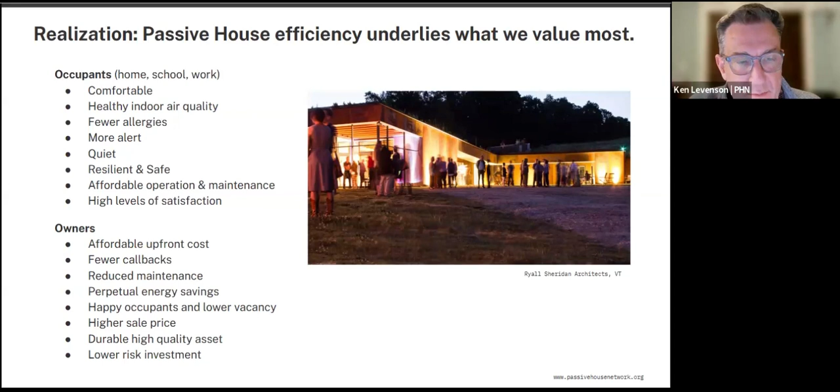So there are a number of ways we could go into that more and more, but let's leave that there for the moment.

The logic of Passive House is interesting, where it came from. Passive House is building science. It's not some crazy esoteric thing. It's all the basic physics that folks have been dealing with for a long time. It's just kind of really focusing it and giving the important things the attention they deserve.

An interesting part of the origin story of Passive House was that the German physicist who really started the modern Passive House movement, Wolfgang Feist in Germany, has this quote: "I was working as a physicist. I read that the construction industry had experimented with adding insulation to new buildings and that energy consumption had failed to reduce. This offended me. It was counter to the basic laws of physics. I knew that they must be doing something wrong. So I made it my mission to find out what and to establish what was needed to do it right."

So here you see this German scientist seeing the building industry applying insulation but not having any beneficial result from it. And we could see that today. The contractors ask, why do we need to do this? And the owner would be like, why did I do that?

It's not unlike cooking, where you have a few key elements of cooking—there's a wonderful book, Salt, Fat, Acid, Heat, you may be familiar with. If we master these basic elements of cooking, we can make a great meal. It's similar with what drives performance, and Passive House kind of uniquely forces us to focus on that.

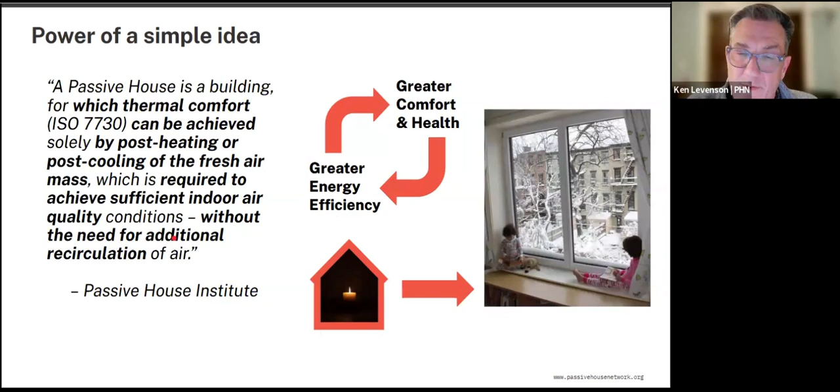So you can sit by a window on a cold winter day and be comfortable without any radiators about. To achieve this thermal condition that's going to allow us to maintain comfort and high quality indoor air quality conditions...

We're focusing on five principal aspects of the building physics. Now, there are other things—orientation, massing, a realm of things—but in terms of the structure itself, the architecture, we're looking at climate-specific levels of insulation, number one. Number two, that insulation needs to be truly continuous, eliminating thermal bridges—we'll come back to that and discuss it more.

Along with the insulation continuity, we want air tightness. We want airtight continuity. We want control of that indoor air. We want to keep the pollution out. And then we want high performance windows and doors with solar protection.

The windows and doors are continuations of the heating, the insulation and the air tightness. They will provide some solar gains, but these are not passive solar houses in the historic sense. We are not needing to overheat with the solar gains. We want to keep it quite modest and balanced. The energy model is very important in that.

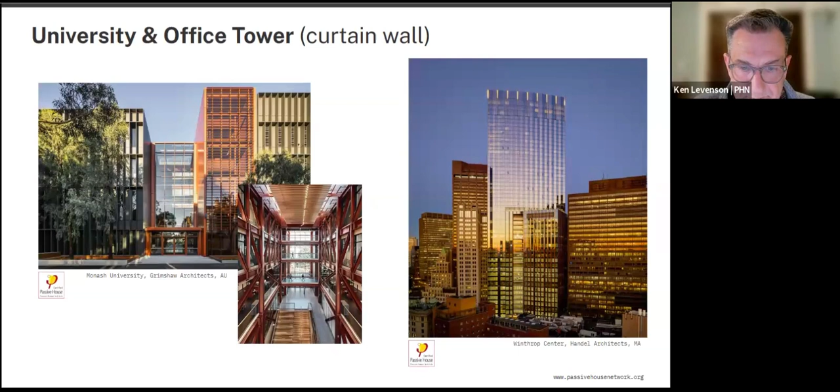But here we see an office tower in Boston, a big university building in Australia. Part of what passive house has become, and it's an important part, is aligning with our all-electric, all-renewable energy future. The typical way we look at energy use with buildings is EUI, source EUI, coming from the coal power plants, the natural gas power plants, the energy losses along the way to a building, and ultimately the use.

This is really based on a carbon emissions approach, which totally makes sense historically. But as we move to an all-electric power supply fueled by all renewables, what really comes into play and what's most important is the simultaneity of the use with the generation, because the different renewables, based on location, climate and characteristics of the grid, give you a different mix of renewable supply. Depending on how you use that energy, it's either going to line up directly with that supply, or you may need some short-term storage day to day to get you through the night, or long-term seasonal storage.

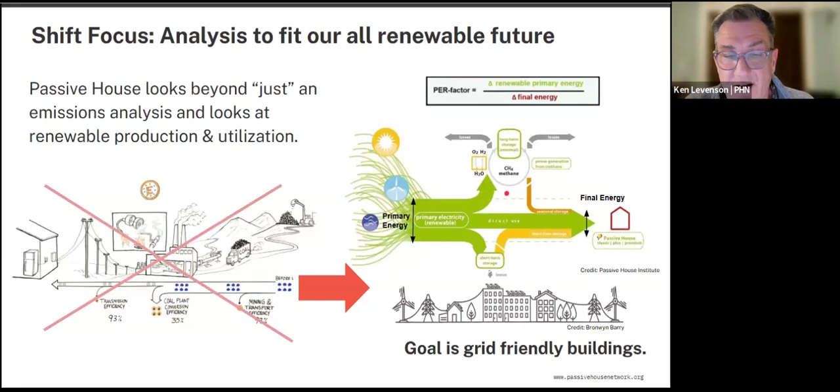And so it's rating how you're using the power to a hypothetical, hopefully not hypothetical, future energy distribution reality. So what we are trying to do ultimately is tune the building to the grid.

So it's not only efficient in terms of the building, but it's efficient in terms of the build out of the grid. Because what we have in typical net zero single family homes, even if they're more energy efficient than what we'd typically be doing, there's still a significant seasonal gap in the winter time, a huge gap between where our renewable production is typically lowest, and then in the summertime we don't need as much, but we've got all this power.

So this is a net zero single family house that really isn't net zero, right? Because it's not producing the energy when they need it. So there are additional losses. For this to be truly net zero, it would need to produce even more energy to make up for those storage losses that would be needed to move this power from summer to winter.

When it's needed. In Passive House, we're crushing that heating demand, we're reducing the overall electric load, and we're tuning the building. So we have a much smaller gap in the wintertime, and we can dial down that renewable production. So the solar panels can really be cut substantially and still hit quote unquote net zero.

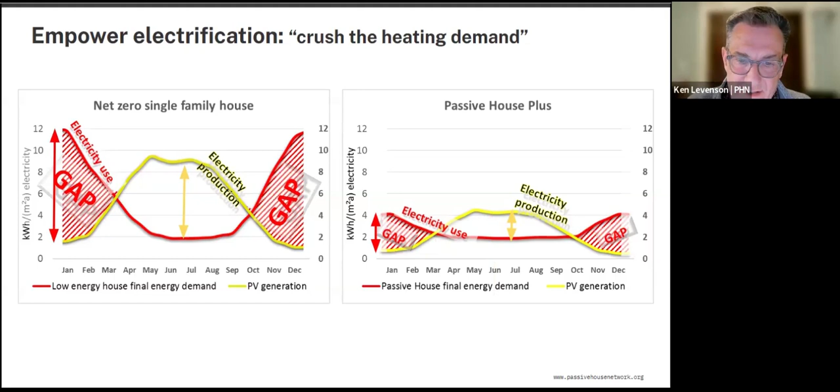One quick example of why we want to move to Passive House. Massachusetts has just brought on mandating Passive House in a number of ways, calling it the thermal code for their commercial buildings, but literally Passive House for multifamily.

And what they did is a study where they showed a school and the load on the electric grid due to heating and cooling of the school. For the model code where they had gas heating, you had a summer peak of the electrical, and there's no electric to speak of in the winter because the heating is with gas, not electric. Now, if they just move to electric heating with the model code, their peak on the grid is going to be over 4 times their summer peak.

And so all of a sudden they're blowing up the grid capacity with this move. And this is one of the big pushes and problems that are stressing the grids, this capacity shift. But if they build the school to passive house levels, the heating demand is no greater than the cooling demand, and so there is no new peak. It's the same old peak. There's no need in terms of this building to increase the capacity of the grid.

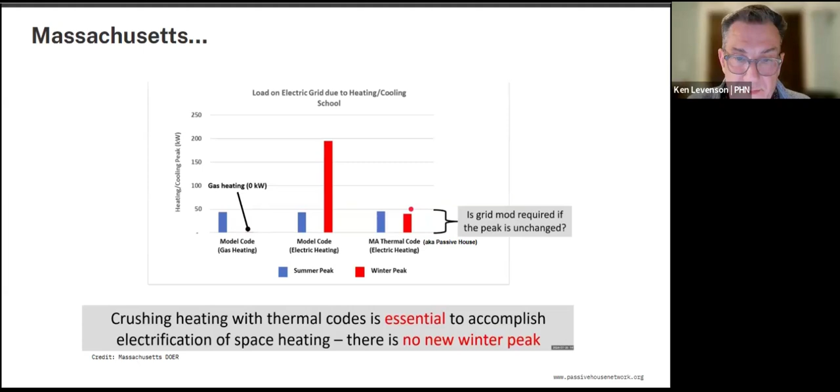And so an investment in Passive House could really be seen as an investment in the grid, and why they see these buildings as being grid friendly and have pushed for investing in them.

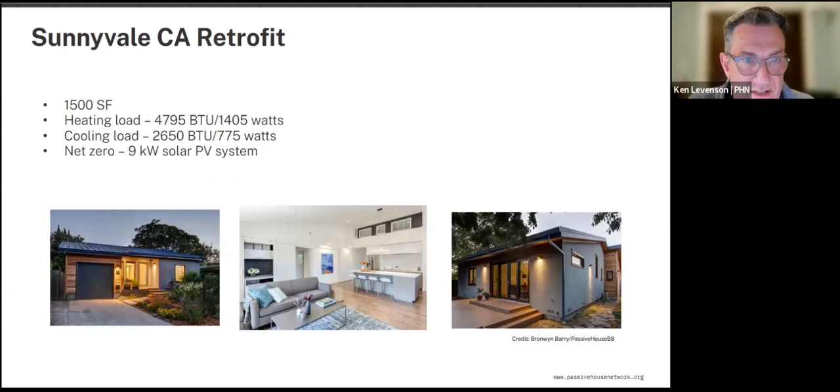Just a quick note, more local, a retrofit here in Sunnyvale, California. A 1,500 square foot modest home went for net zero with a 9 kilowatt solar PV system. But it's true net zero in the sense that, here are some of the things they're using: induction cooktop, heat pump hot water heater, mini split heat pump for heating and cooling with compressor outside, typical stuff in terms of electrification.

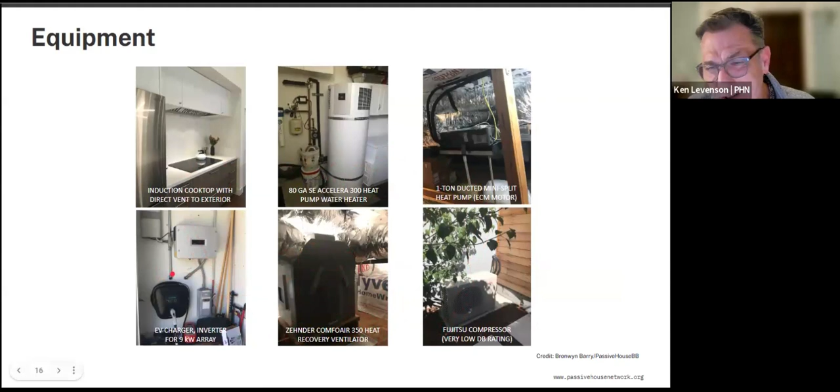Then we've got a Zehnder ventilation system with heat recovery and a charger for the car. Cars and the charger for the car are not part of the passive house calculation, but you can end up getting essentially free car charging with the reduced demand that the house needs because of the passive house.

So the results from this house: this top blue line is the typical houses in the zip code. The lighter blue line is the predicted energy use by the energy model, and the yellow line is the actual use. And so you have this pretty nice flat line.

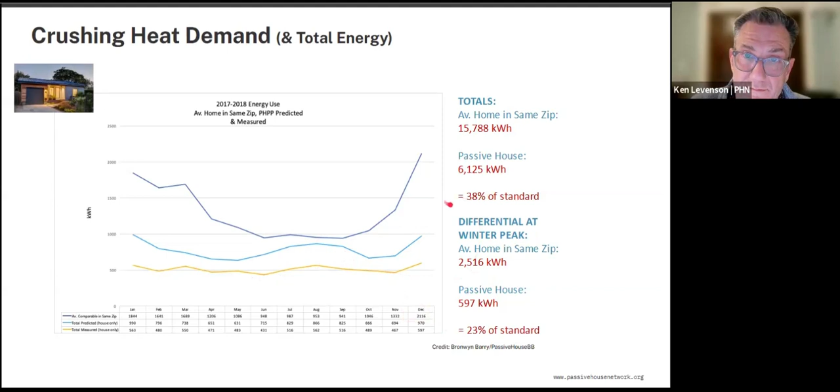You have a pretty substantial reduction in demand of 40% of overall energy use, 38%. And what it does is, rather than having this wild swing of power, it's much more consistently tuned. We have a 726 kilowatt hour monthly average used and 797 monthly average produced without huge gaps, which is quite nice.

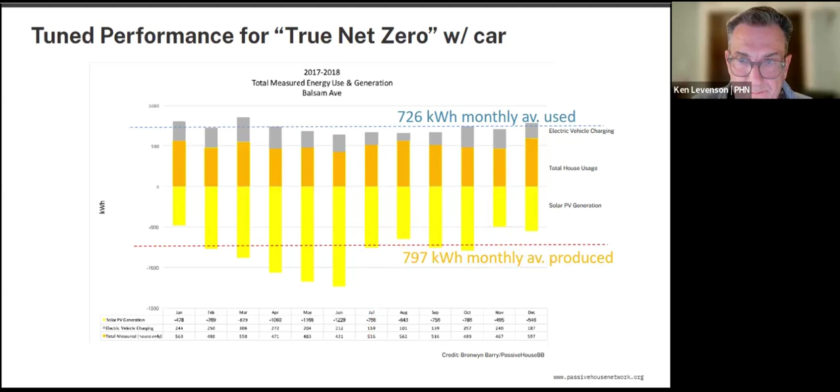Other homes are just over in the west, Santa Fe, New Mexico, up in Olympia, Washington. They can be any style, any shape and size.

One of the interesting things is, as an architect, I stopped practicing architecture, ironically, back in the day, shortly after those first few projects that I did, because I got into passive house advocacy and growing the capacity in the United States. But as an architect, what really intrigued me was this idea.

What Passive House was focusing on was the architecture, the structure, the fabric of the building. And it really was empowering the structure of the building to drive performance. Many architects may see that as a burden, like gravity is a burden.

But I think the way to really look at it is getting back into the details and how, before we had big central air conditioning systems, we worked with building form to provide shading and more comfortable spaces while still connecting to the outside.

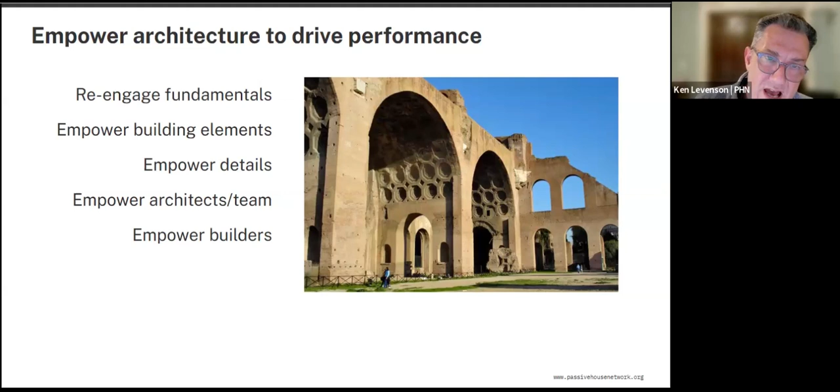And so we see teams really getting jazzed by that, and also the builders as well, as they're not just putting together a kit of parts per se. They're putting together a whole optimized machine in a way, and what they do really drives the performance of the building in a measurable way.

Passive House, of course, didn't come out of nowhere. There were precursors, and we have in Scandinavia and Germany buildings and studies done in the U.S. and in Canada. Interestingly, the Norwegian polar explorer ship, the Fram, had all the attributes of a passive house.

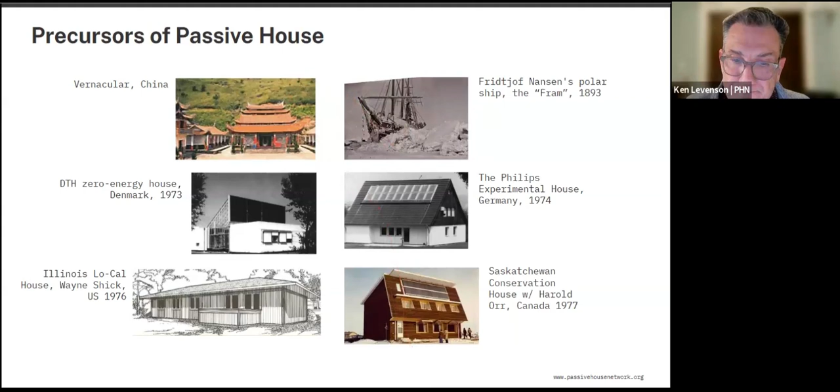Vernacular architecture, of course, and I think one way architects and passive house architects work is they may still be doing modern buildings, but look at vernacular architecture and what happened, in particular in southern China. Swedish academic Bo Adamson was doing research on the buildings of southern China and their passive attributes, which led directly to the creation of the first modern passive house building, completed in 1991, with Wolfgang Feist, who we had that quote with earlier on.

It's not a single family home. It's actually four flats, more like four row houses, a small multifamily building with units. They did it as a physics experiment. They had custom windows, a custom ventilation system. They tried to make it as low energy as they could go and test the boundaries to see what was possible.

The story goes that Amory Lovins came from the Rocky Mountain Institute, visited, and was super excited. He was like, 'My gosh, this could be scaled. This isn't just a laboratory experiment. You need to roll this out.' And from this initial experiment, the Passive House Institute was formed in 1996.

They kind of formalized the protocols, the energy modeling, and have been doing research ever since. The institute is a research, building performance research laboratory institute that's been doing research around Passive House ever since.

One of these things hitting this low energy state, we saw with the Massachusetts school example how it really crushed that heating load. It's the same with the Sunnyvale home, having specific targets. It's not percentage improvement, so we're going for a number, and that changes everything in terms of our optimization and staying focused on it.

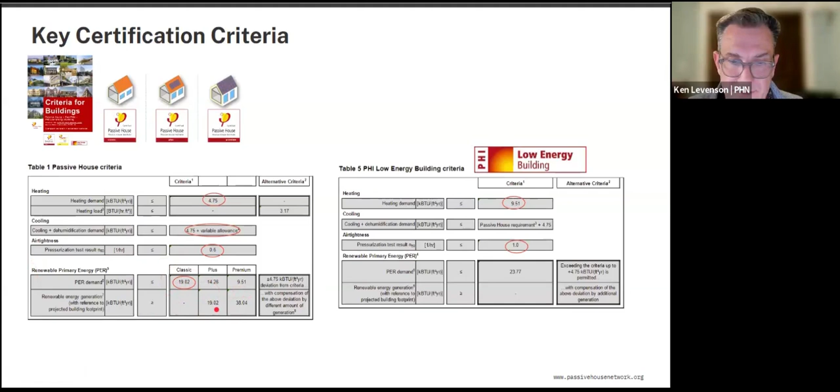There is an energy limit, but it's based not on the source EUI carbon emissions number that we would have done traditionally, although you can calculate that in the PHPP. It's done based on this primary energy number. So it doesn't correlate directly, but you're being graded on your suitability to the future power grid.

There's also a retrofit standard. You can do a retrofit and certify to the standards, but because there's typically going to be conditions with an existing building that make it very difficult, they have the retrofit standard.

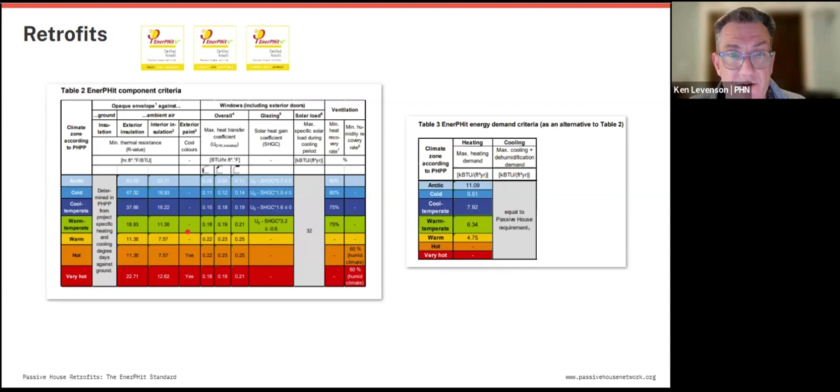There are two pathways: you could do the different demand levels where they've eased them up, or you could do a component method where the different assemblies require different R and U values depending on your climate zone. You're still calculating, still goes into the energy model, but it's more of a slice and dice approach that can be easier to optimize.

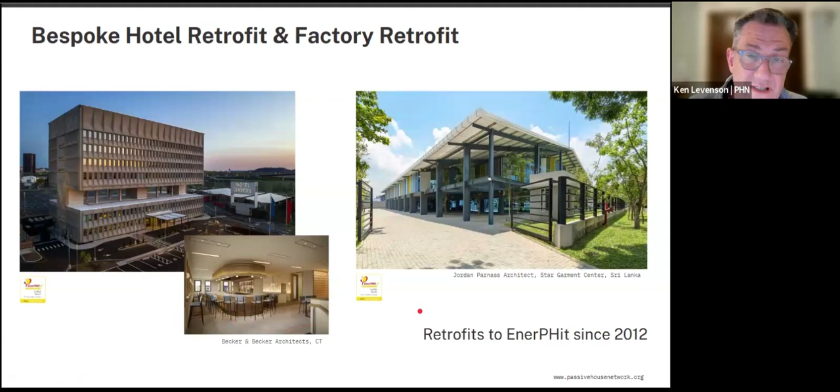These are two fun projects in terms of retrofits to think about what's possible. On the left is a classic brutalist building in New Haven, Connecticut, by Marcel Breuer for Armstrong Rubber back in the day. It sat vacant for many years and has recently been reborn as Hotel Marcel, certified as a Passive House retrofit. On the right is a garment factory in Sri Lanka -- hot, humid climate, factory use, and a retrofit. So a lot going on there.

Predictable performance is the thing. We can do energy efficient buildings just within the bounds of using the building code. We'll need to do better than code buildings to be really energy efficient, but you don't need to follow a specific program -- you just need to get there. But there's no assurance of getting there without clear guidelines.

LEED is great for a lot of things in terms of sustainability and definitely can be worth doing, but energy use at the end of the day, and the benefits that arise directly out of that, perhaps not the way that LEED is built. So you could have a really bad performing LEED building or a great performing LEED building, but you could still have LEED certification.

In a Passive House, there's going to be some variability -- occupancy, user differences in how they might use the building -- but we're going to have a pretty narrow band of usage. That house I did, that first house in New York, the townhouse, was actually in Brooklyn Heights. It was a pre-Civil War building, 1849 I think it was. All the other neighbors had 12 to 15 tons of air conditioning. Our calculations said that we needed 1.5 tons, for a 5-story, 5,500 square foot home.

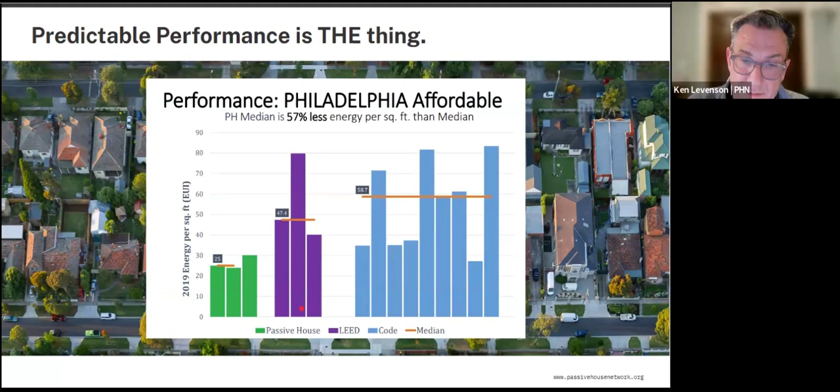And that's scary as heck when your client is spending a fair amount of money gut renovating a home. So we knew there was some variability -- we increased the size of the mechanical system from 1.5 tons to 3 tons. But we're still dropping from 12 to 15 tons to 3 tons, and you better be sure that you're going to be hitting that, or we're going to have very unhappy clients. The Passive House methodology is what gives us that confidence that we're going to hit the predictable performance -- super important for overall design optimization and controlling costs as well.

Passive House is high quality construction. It's going to typically cost a little bit more -- it doesn't have to cost a lot more. In multifamily buildings today, we see it costing 2 to 5% more, pushing towards parity.

Which just tells me that there are a lot of drivers of cost in a project, and passive house does not need to be the overriding cost factor. If you're optimizing, you can control the costs and even come in very close to cost parity. Here, this is multifamily again—they actually came out with the passive house being slightly less, if you can believe it, than the conventional. This is Pennsylvania Housing Finance Agency. I'm not going to sell that passive house costs less. It is high quality, but it does show that the optimization is there and possible. What you need to really focus on is applying passive house from day one in the program and really have it there as a key programmatic element.

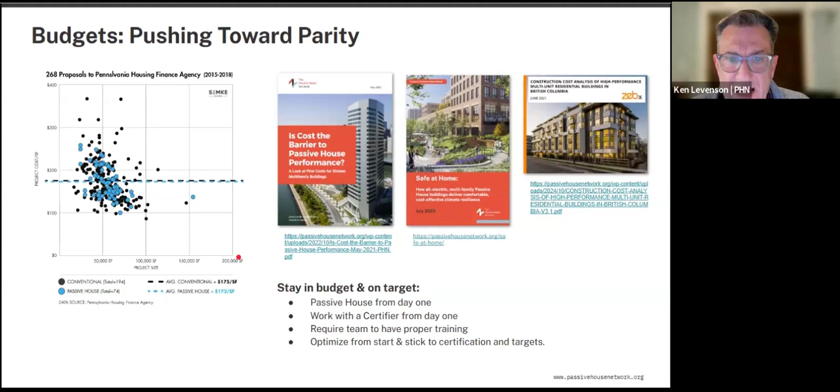Like gravity is a key programmatic element, we want to work with a certifier from day one. A certifier can cost a few extra dollars, and there is one in the East Bay, Steve Mann, an early adopter—he's a passive house building certifier in Berkeley. Work with him or another one of the certifiers; there are over 35 now working in the United States. They can really help you avoid costly mistakes and help move the project along in a smart way. Have the team get some proper training and stick to those goals—it will actually help keep things on target.

So let's dive through the methodology in a little more detail. We'll go through this pretty quickly. So climate specific insulation levels, in your neck of the woods in California, unless you're up at the higher elevations or further north, I'm imagining it's not too difficult in terms of the insulation levels. It can be pretty modest. The idea is going to be continuous and appropriate.

So it's not reacting to the environment so dramatically. I like to say that our conventional buildings are kind of like teenagers who are wearing hoodies on cold winter days—it's just substandard. We wouldn't dress ourselves like that, and we shouldn't be dressing our buildings like that. We want a good parka that's appropriate to the weather.

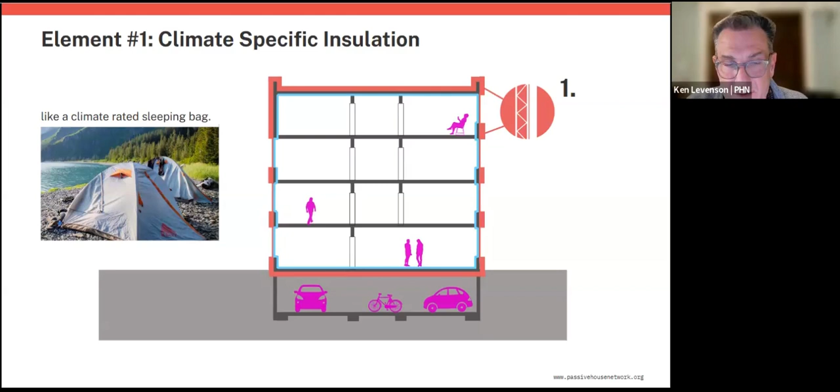We want that parka and insulation around the building to have as few thermal bridges as possible. We want to calculate them if we do; even if we don't, there are pluses and minuses to it. And we're going to be looking at every intersection—the floor to the wall, the roof to the wall, where structures come through, how the windows attach to it. It's a big difference between conventional energy modeling and passive house, where we're really nailing down all of these parts.

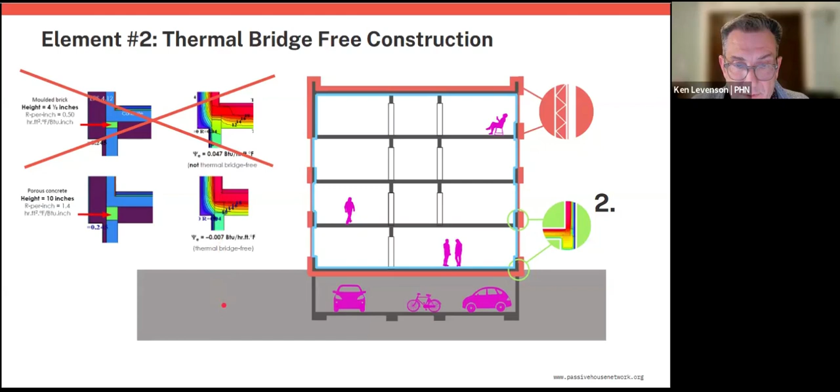Because what you can have is like this diagram—we have the wall and the floor, you have insulation, but then you have the masonry coming up through, stopping the insulation, and we have a masonry unit that is not insulative, and we have a thermal bridge. It's not thermal bridge free. However, if we just substitute this material for AAC block, porous concrete block, it's going to be insulative enough for it to not be a thermal bridge. It becomes thermal bridge free. It's keeping the surfaces warmer, the structure warmer, and maintaining that performance. So it doesn't need to be elaborate—it just needs to be thoughtful and intentful.

We want thermal bridge-free construction because in a passive house, typically we're going to have better humidity conditions than we would in a conventional house. We're going to target between 40 and 60% indoor air humidity—in the winter that'll be pushing towards 40, in the summer towards 60% typically. And if we have thermal bridges, if we have cold surfaces and we have more humidity, then we're going to have condensation and mold problems.

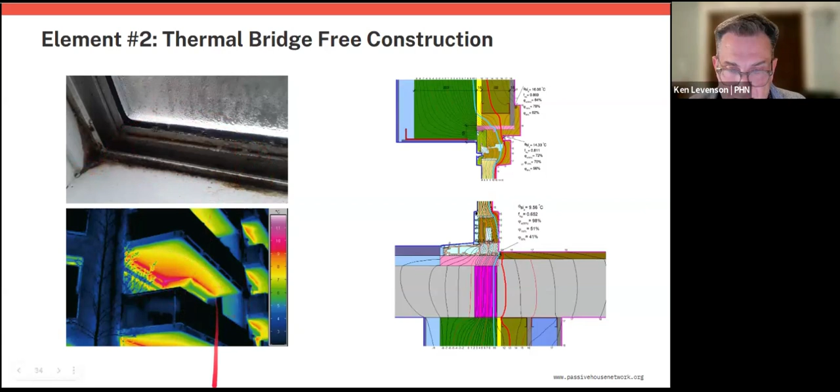This is just conventional building, but so be it—so we very much zero in on that. Typical buildings have so many thermal bridges, they're basically radiators to the world. We want to make sure our components are in alignment, and again we have that good, good thermos construction. Airtight—we also now call it smoke tight over the last few years of wildfires, and we experienced it in New York actually a year and a half ago or so.

With our skies becoming orange, airtight construction keeps the outdoor pollution out. It also reduces drafts and moisture damage, allows us to control humidity inside with much less energy, and allows us to control temperature with much less energy, making sure we have good control of indoor air quality.

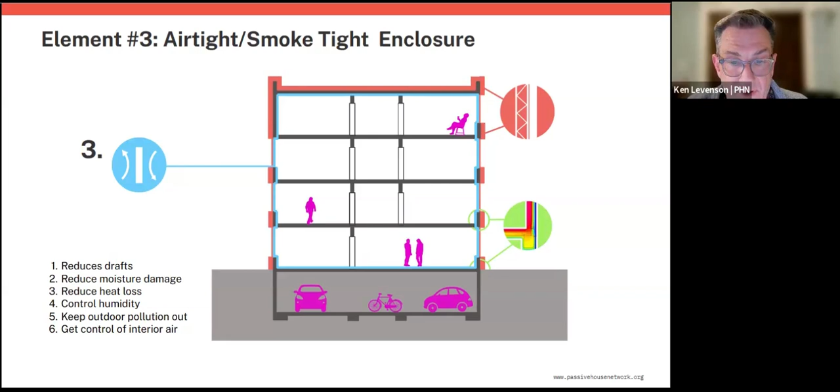With ventilation, we know we can maintain a very high level of indoor air quality with a small amount of energy. So air tightness is fundamental to a whole range of aspects of performance, like a windbreaker over a fleece sweater. The windows typically are going to be triple glazed and truly thermally broken.

They don't always have to be triple glazed. It's very climate dependent, but often. We see this as part of fire resilience as well. You can see the air tightness, but also the triple glazing, the simplified form in some respects. A number of aspects of passive house design, while not done with the intention of being fire resilient, do add to the building's wildfire resilience.

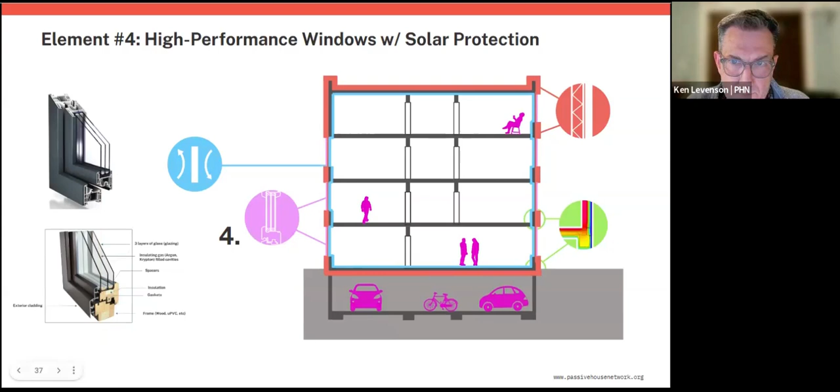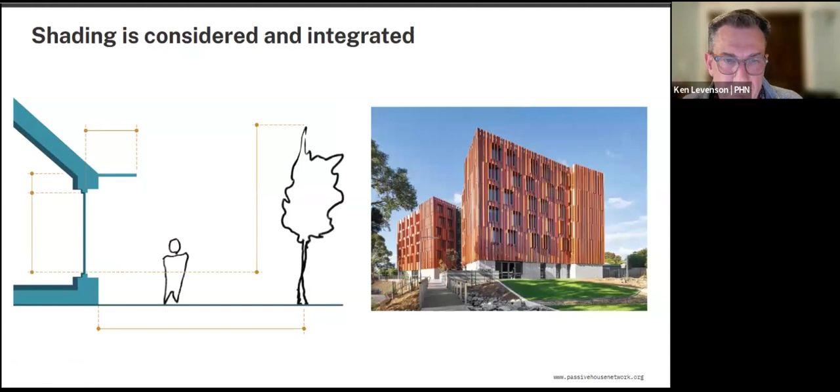There's going to be triple gasketing as well for air tightness. We're going to look at shading, and hopefully shading becomes an architectural element. We want to use all our space comfortably. The triple glazing is really a comfort-driven thing, and we want to get away from the typical where the glass gets too cold.

We feel the asymmetric radiation losses, causing convective currents, things we have to overcome with mechanical systems. If we can get that temperature close enough to the other surfaces, we have a much more thermally calm space.

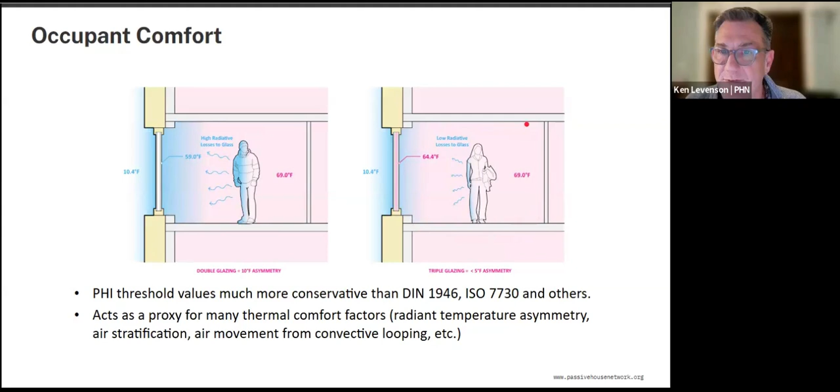So you have the acoustic calmness, you have the thermal calmness. Typically when people visit a passive house and experience that, they're like, oh yeah, I want this. This is nice. It does not feel weird. It feels really comfortable.

Hygienic ventilation with heat recovery. So hygiene, right? Good hygienic indoor conditions was a key part of that definition initially. So we're supplying fresh air 24/7 continuously to all the served spaces, the bedrooms, the living rooms, the offices, the classrooms, the assembly places, the conference rooms.

And we're exhausting from the service spaces, the bathrooms, kitchens, hallways, utility rooms, and so forth, laying it out in a way to make sure that we are going to have good ventilation no matter the conditions outside, and know that it's guaranteed. Because we're running it 24/7, it's 100% supply and exhaust.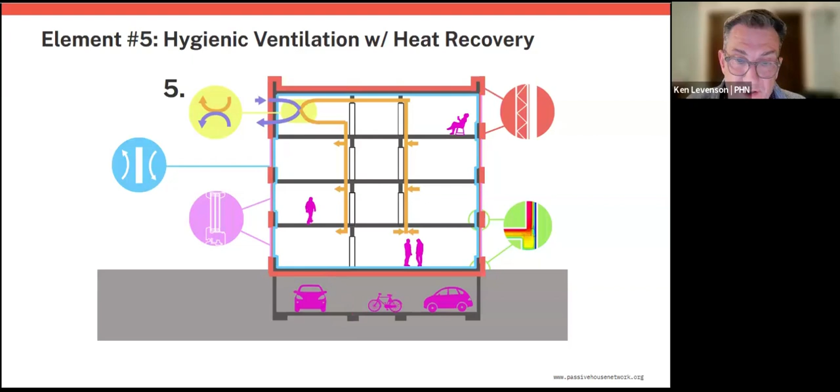We're running it through a heat exchanger and recovering that air. We're also filtering the air, getting rid of the allergens and making it more healthy and comfortable.

But as that air is going out, the fresh air is coming through counterflow heat exchange, and we can now get heat recovery over 90%. So very little energy loss with really good units and really good comfort.

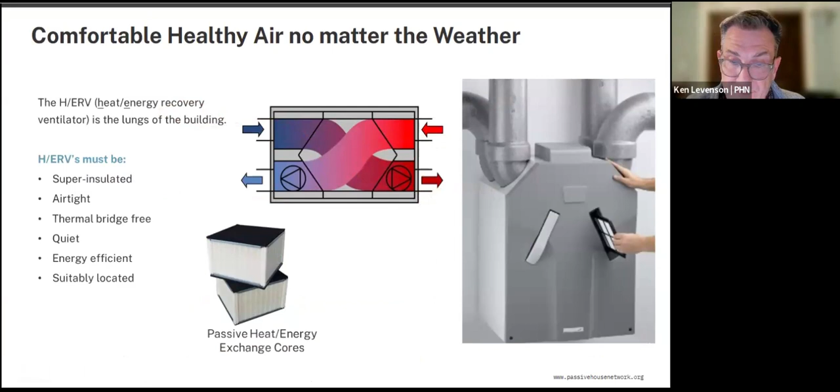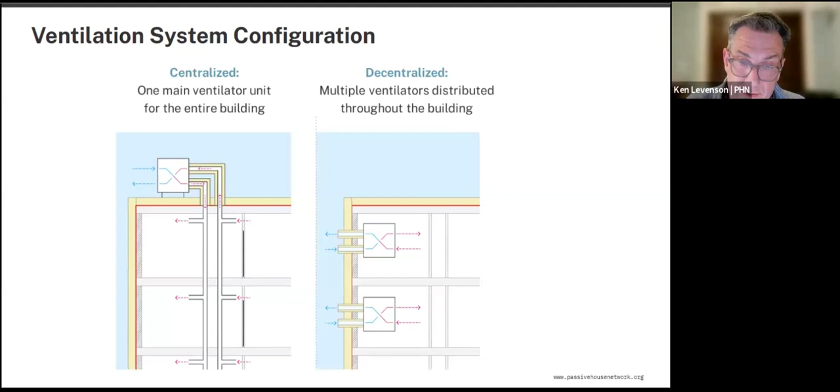They're also very quiet, it's just two fans running, very energy efficient fans. It's like having two bathroom fans running, but now you're ventilating your whole house, decentralized or centralized.

So we've established the performance, then we right size the heating and cooling. We're talking about typically around a 75% reduction in sizing. Typically now it's heat pump, combined heating and cooling.

We can pull the distribution to the core of the building. We still want to put the conditioned air into the spaces we need it, but we can pull it to the interior walls, and it doesn't need to be in any particular spot per se, just in that space. So it's freeing up a lot. The insulation may take away a couple inches, but the mechanical systems can give back some inches as well.

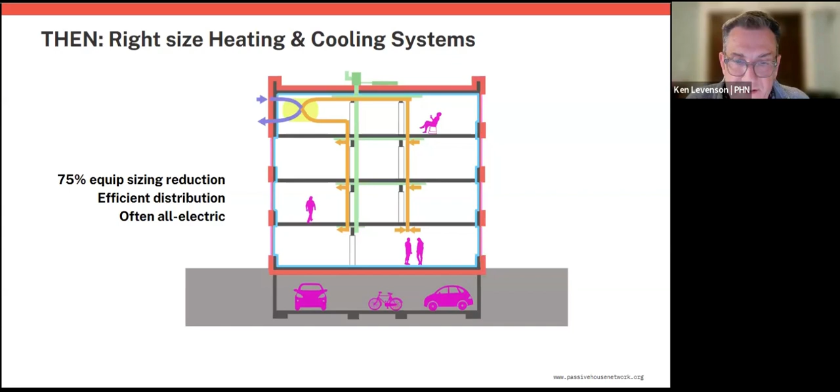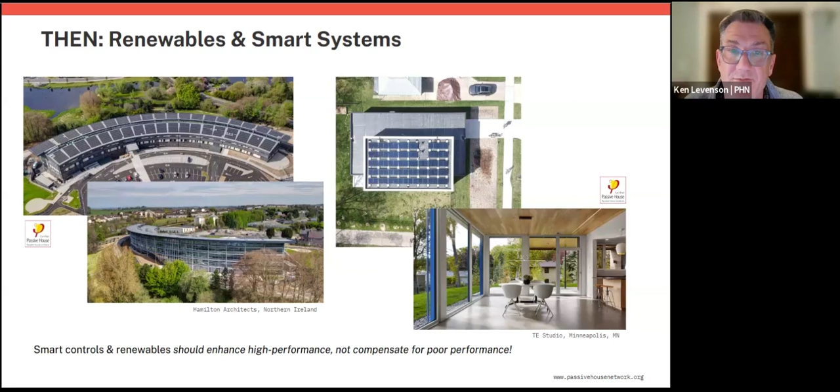Once we've added the heating and cooling, now we're talking about renewables and smart systems. You can do a smart system, you can do renewables, it's part of the standard. What we don't want is the smart systems and renewables to compensate for poor performance. We want them to enhance high performance.

So we've got our optimized design. It's going all around the world, it's applicable everywhere. In many cases, although it's about climate mitigation initially and reducing carbon emissions, it's also very much about adaptation, that as heat waves come, as freezing polar vortexes come, power outages come, wildfires come, these are more resilient, safer spaces to be in.

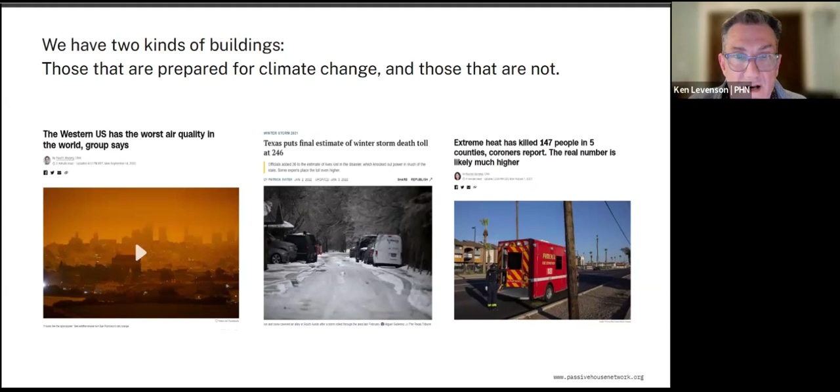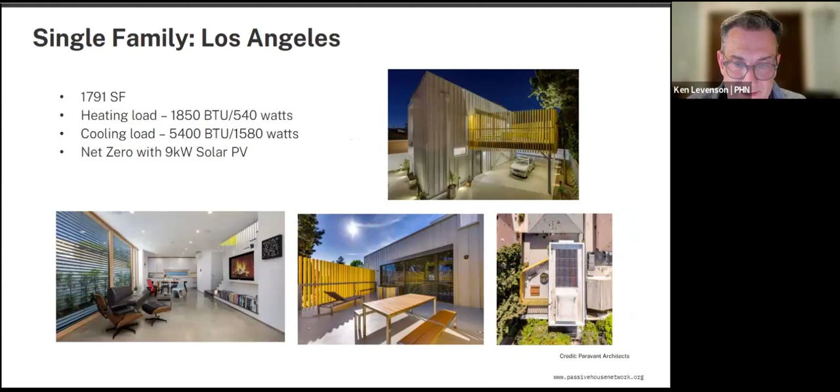Here's a single family house in Los Angeles that was not near the fires, but a great example, very compact, quite modern looking, with solar panels, the typical kind of setup as we saw, although they did the solar shading to great effect on this building.

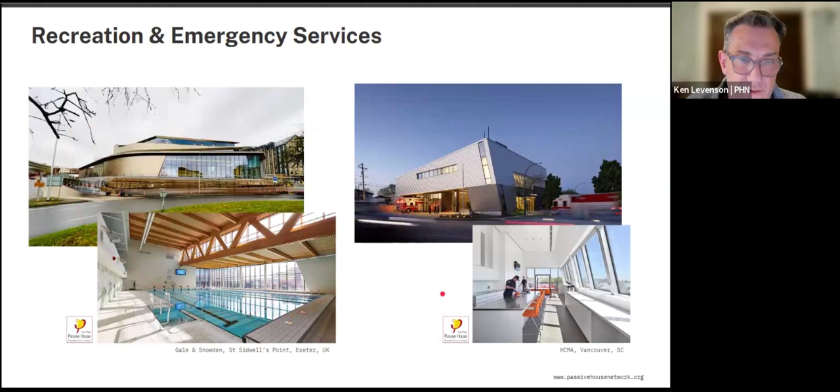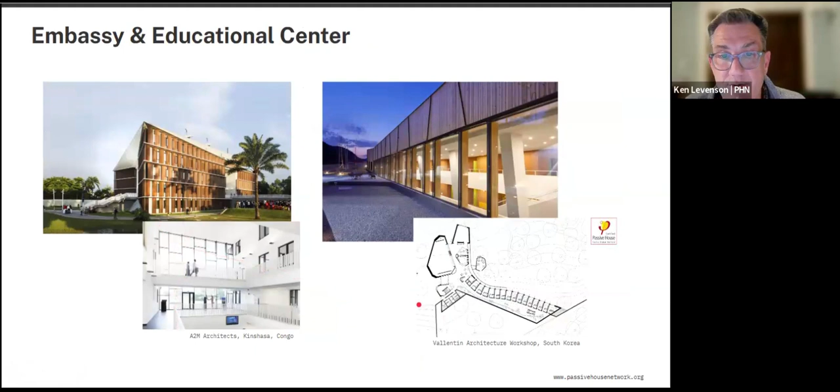Fire station in Vancouver. On the left is the Dutch and Belgian embassy in Kinshasa, Congo, a hot, humid climate as well. Humid climate in South Korea, an education center.

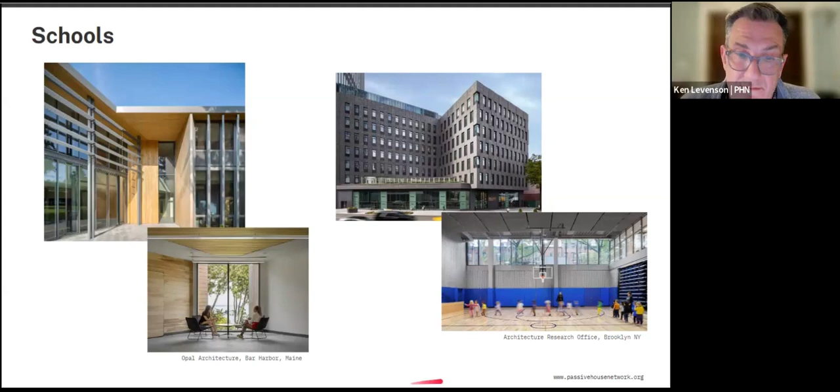Beautiful buildings. A college in the Northeast on the Atlantic coast in Bar Harbor, Maine. And new schools that were just completed this past year, an elementary school and a high school in downtown Brooklyn in New York City. So a range of things, everything's possible.